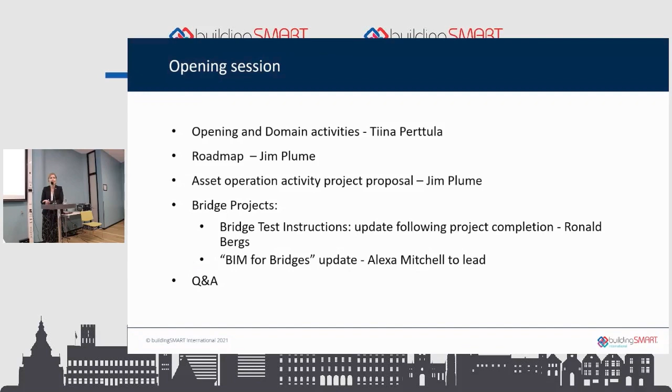Then the opening session presenters, they were shown in John's slides as well, so I won't go into any further details. We have the question and answer session after all presentations, so maybe if you have just one quick comment, we can take those between the presentations, but mainly we are having this conversation part after, so that's why we want to have enough time for all the presenters.

Then about how our infra domain looks like. So we do have the steering committee, and inside the steering committee, we do have different types of roles.

So Jim is here today with me. Jim Plume is our deputy chair in the steering committee. Then we have the technical leader, which is Phil Jackson. Phil is not here in the Lillestrøm summit physically, so he is attending remotely for some of the sessions, unfortunately. And then we have the infra-domain project steering committee.

So that's the steering committee for the project run under the infra domain. The chair of the committee is Marek Suchocki, and Jim Plume is the deputy for the project steering committee. Of course, the stakeholders and project managers are involved to discuss the coming topics and development areas inside those infra-domain projects.

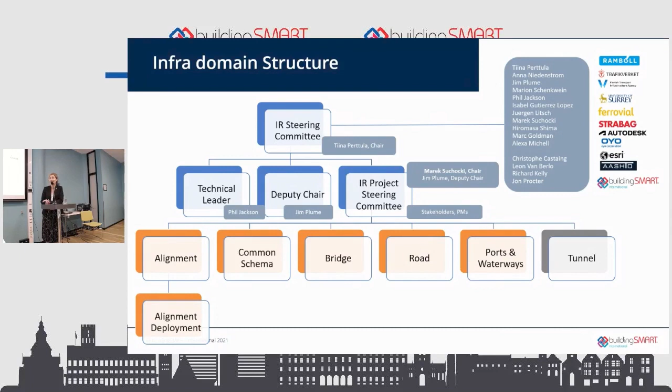Then about our focus areas. The roadmap for 23-27 is of course at the core of everything, and Jim will give the latest updates. The roadmap itself is almost finalized, so it just needs final approval from the SCTE.

Then, of course, there's the question about these technical services like IDS, bSDD, and use case management, and how to work with them. The next session together with the railway domain concentrates on the user experience related to these kinds of tools and services. Then a short update also from the asset operation handover activity proposal.

So what we have been focused on inside the infra domain, and how we think to move forward with the project itself. Then the ISO process I already mentioned. We have been monitoring the ISO process inside the steering committee, and we have been kept updated about the kind of outcomes from the votings and so on.

I'm very pleased to have a good group from buildingSMART International to drive through this ISO process. And of course, there is a lot of liaison with other standardization committees like CEN TC 442, and also now there has been established the BIM GIS group inside buildingSMART International, together with the OGC, and one of our steering committee members,

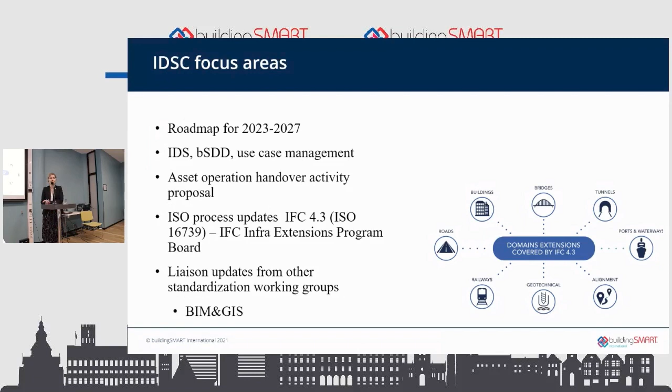But then, how to move forward? I think that one of these topics will be attached to the roadmap work as well, which Jim will present in a short while.

I'm not sure how many of you were here yesterday when they saw the technical roadmap, where for example IFC 5 was mentioned. So it's a question about how to move from IFC 4.3 or 4.4 to IFC 5, and what we as an infra domain should know about the changes, and how can we be part of maybe those groups or technical committees that will work together on the modernization of IFC itself.

But then, when we are coming from the infra domain, it's of course a question about the life cycle itself. How to move from project information to asset information, how to implement ISO 19650. I know it has been at least partly implemented, maybe in some of the organizations already, but there are huge questions related to how to move from the PIM model to the AIM model.

Also the asset register, the databases where all the existing data is located nowadays - how that data fits into IFC, and when can we best utilize the data that has already been collected. Is there a way to harmonize some of the property sets, or maybe the values or other things, because there are a lot of infra owners inside the infra domain.

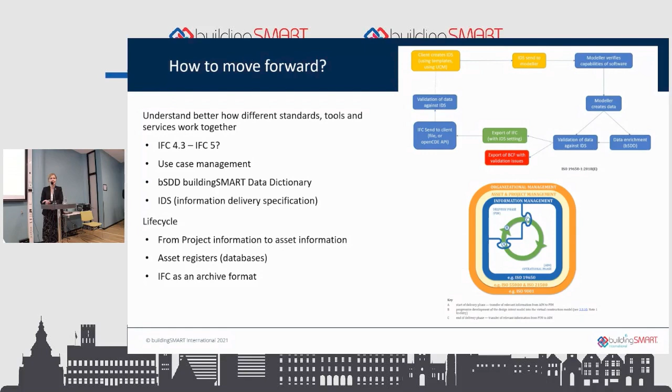And also it's a question about IFC as an archive format, because these legal processes that almost every country's different design phases need to go through are the processes where documentation is created. So what if IFC or some digital format becomes the archiving format in the future? We need further investigation into those topics as well.

But this all links to the roadmap work very well and fits there, and that's why we'd hope to see many of you working with this topic with us in the future in different working groups.

We also need to understand better what needs to be standardized or harmonized. It could be cross-domain, together with the railway, airport, or construction domains, and it could also go to the national level, for how to implement these international standards nationally.

Then there might be requirements coming through owner organizations, like infrastructure owner organizations in different countries. Nowadays maybe some of these requirements are mainly project-based, so we create the BIM execution plan at the project level, but how do we get the circle to be full with the life cycle and ISO 19650? These are really interesting and crucial topics for us to cover.

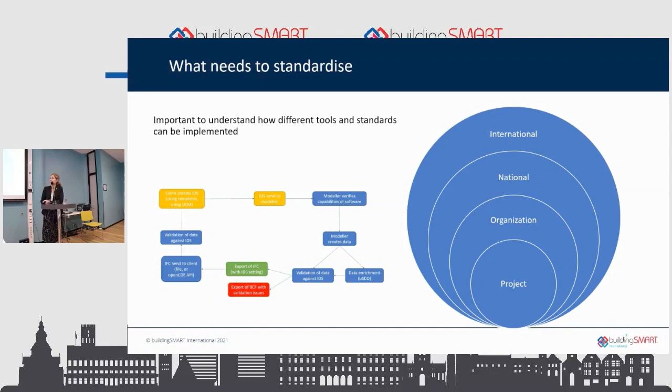A little bit about our sessions during the summit: next we have a joint session with the railway domain about use case management and building smart data dictionaries. It's not a technical session at all—it's about user experience and how to move forward within both domains, how we want to establish collaboration between different domains, because these topics have been recognized across many domains inside buildingSMART, and also how to get our voice heard, especially as infrastructure and railway owners.

Then the last session for today is the Nordic collaboration. We have many interesting presentations during this last session, including one about the Nordic hub collaboration—the Nordic chapters working together.

There's also collaboration through the so-called Nordic BIM client group, where infrastructure organizations in the Nordic countries have put their forces together to try to guide how implementation should happen consistently across different Nordic countries, and to share cross-national topics together.

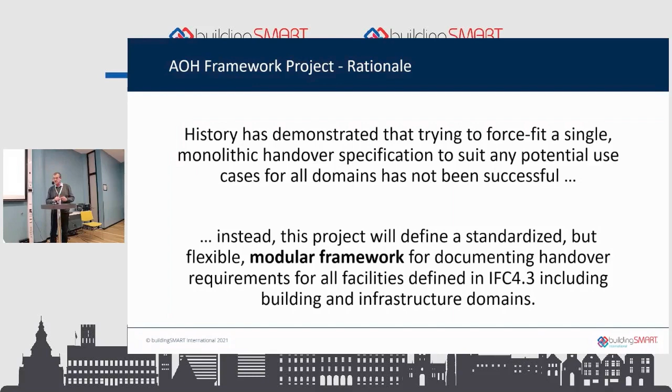You'll see in a minute it's seen as a modular structure that doesn't try to cover every use case. It tries to set up a framework for identifying appropriate use cases, and diagrammatically it looks something like this.

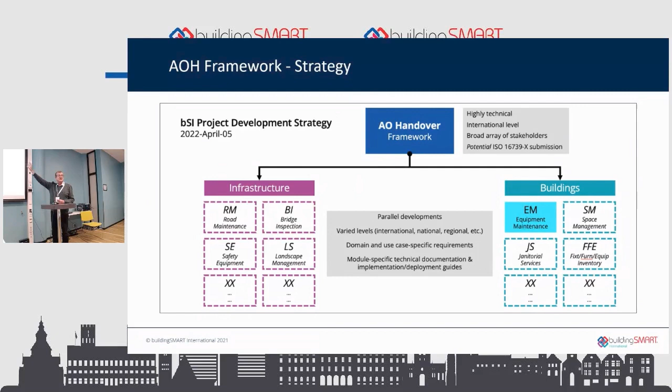So part of our aim as a working group in infrastructure is to think about what are the use cases that are important for infrastructure, in order to contribute to the design of that framework at the top of the diagram.

That's what I expressed in the next figure. What we're focused on at the moment is not this detail, because that's part of stage 2 - that's when the project is running and has already developed the framework. We would then start to look at the detail of both infrastructure and building, but our focus initially is on that framework and what that might look like.

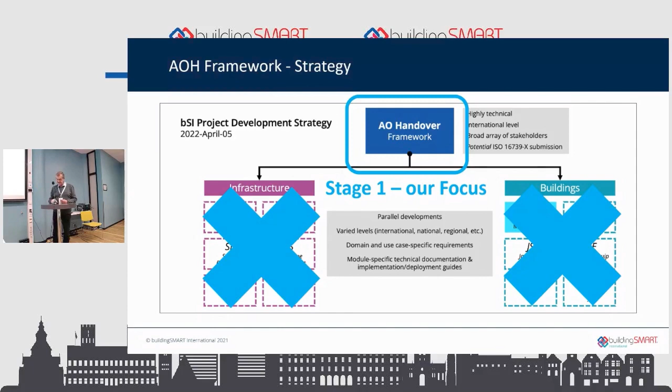So the strategy for us at the moment has two main components. The core specification includes a common set of data exchange requirements needed for all handover exchanges and domains, which may be expressed as a base MVD. That's one activity, which may lead to another base MVD appropriate to this particular broad use case of asset handover at the operations phase.

The second is process and templates to identify and specify the domain-specific entities and the properties required to solve a variety of handover use cases as modules. And so this is where the idea of the modules comes in.

The work that's already been done historically includes things like COBie and FM handover - attempts to tackle this issue in the past. Now we're proposing a framework with a core and a set of generic modules that can then be used to assemble particular use cases across the two domains.

So the blue is building and the green is infrastructure. Again, none of these are locked in - they're simply conceptual placeholders, if you like. Our challenge now is to think about what use cases are going to be needed to help us understand what that core might look like.

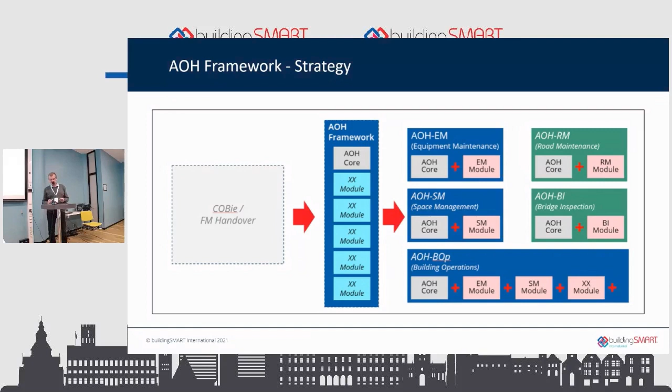So we're trying to develop a framework. We're coming at this with no preconceived ideas. We're coming at it as a search, a process of discovery.

So in our workshop, the framework expressed above is IFC focused, so there's this tendency to think in IFC terms. We've talked about base MVDs, and we've talked about IDS, information delivery specifications, as the tools.

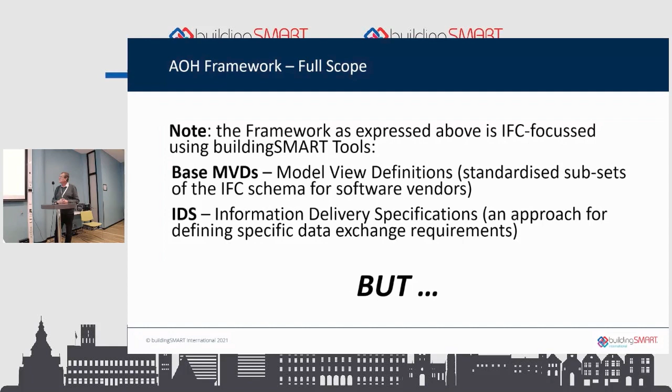But, and there's a big but here, in our domain these IFC-based workflows are seen as only half the story. We need the industry expertise from our domain - in the context of the workshop, that's the participants - to identify corresponding alternative exchange formats and associated workflows. We recognize that in our domain it's not just all about IFC and buildingSMART standards, it's about all the other sources of information and ideas that may be relevant to this issue.

And that is where you, the workshop participants, come into the picture. So we then set this up as our goal for the workshop.

We had two goals. First, we wanted to explore why this is actually needed, because one of our challenges at the moment is that we think this work needs to be done, but we don't have much industry support. We've got a couple of organisations that have put in some base funding, but we need serious funding if we're going to drive this project forward. It'll never happen unless we get that support.

So we needed to think about what the business case is - how can we persuade organisations to participate in this activity? Then we spent the second half of the workshop, which was only two hours, looking at critical use cases that might inform or help us understand what that framework might look like.

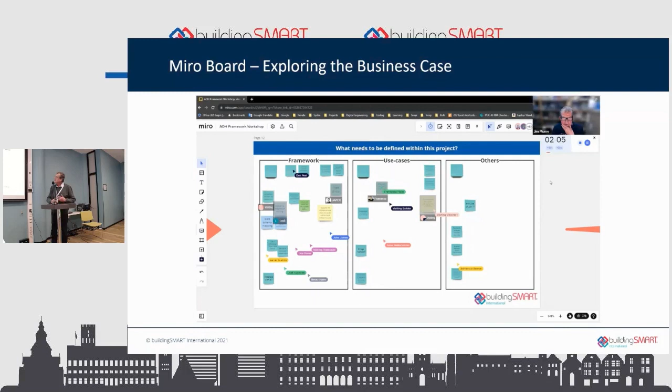So here, for example, when we were looking at the business case, we were asking people to think about what the framework might look like. What are the use cases? What are other things that might inform the way the project is structured? You can see they had notes they could grab, and we encouraged them to grab the notes and put comments on. There was a very lively activity as they populated and answered those questions with their notes.

We then moved on further on the business case - that was the what, this is the why, I think. And so we broke it up into... oh sorry, no, I've got myself confused - this is use cases, thank you. I put a wrong heading up there and confused myself totally. So then we went on to the use cases.

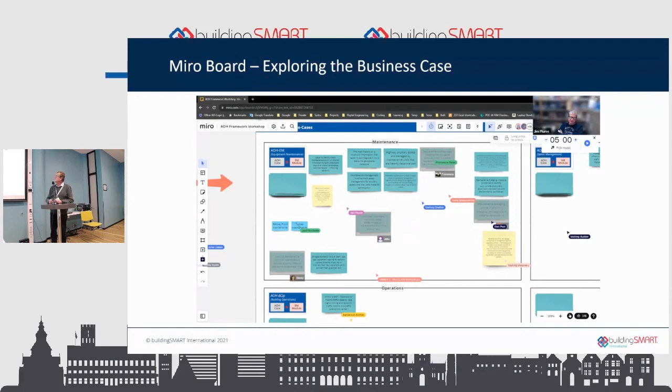So we decided to organise the use cases under three generic topics: use cases related to maintenance, use cases that relate to building operations, and the other one was spatial hierarchy or spaces. We got all these comments put on there, and we then asked them to vote on those - these are the three areas of operations, maintenance, and space management, and people voted.

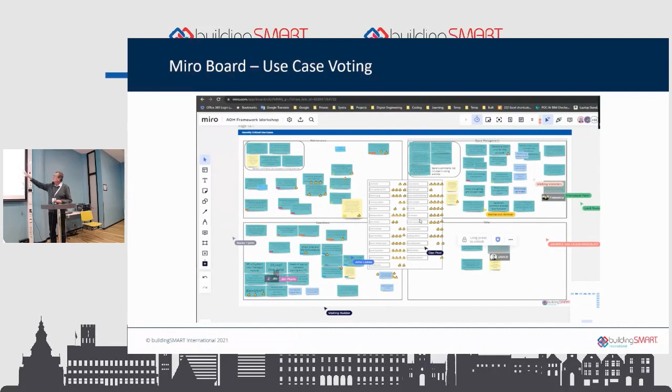This is the voting process, and that finished with these are all the votes. You see that there were people who either didn't vote for whatever reason, or others who weren't able to join the workshop at the last minute. But happily, the Miro board still exists, and people have been able to come in subsequently and add their content to it.

We then, literally in the last few days, pulled out the key outcomes from that, and that's why Anna very kindly stood up - she's going to talk quickly to this, because she worked on this, a first attempt, if you like, at pulling out the outcomes from the business case.

So this is to provide you an overview of the output. We had a lot of people joining the workshop, and they were very eager to contribute, so we got a lot of input. This is just to summarize the Miro board and the notes that we got. This was really to build the business case: what is the value of this project, what can it actually bring to different people? We wanted to have the big picture to be able to promote this project.

When we asked about why this was important, to see the opportunities, people were saying that we need to leverage the value of asset data, to see the value in the data that we create throughout the life cycle.

We need a standardized way of collating all the different information that we create during a project, especially focusing on the information required for the handover. And then optimization - there's a lot of value in optimization. The participants really recognized the ability to automate this process, and again, to increase the quality - not only the value of the data, but the quality of the data.

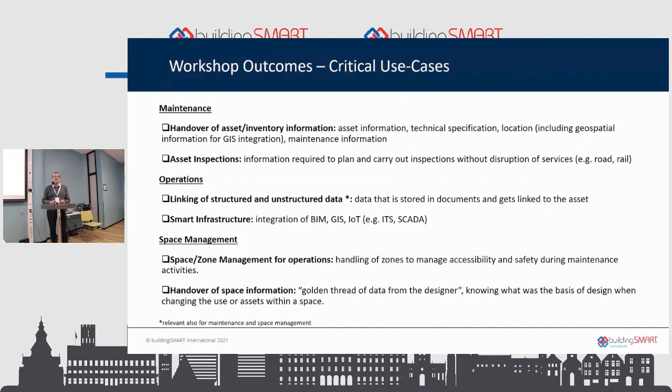The last slide here is the critical use cases, and this is the result of the voting. I'm not going to go through them all because we've run out of time, but you can see that some of the things that came out under maintenance was the handover of asset inventory information.

Operations, the key one was linking structured and unstructured data. How do we do that? And the issue of integration of BIM, GIS and IoT and other things is seen as very important. And under space management, there was the proposal and suggestion of handling zones to manage accessibility and safety during maintenance as a key use case. So these are the use cases that came out.

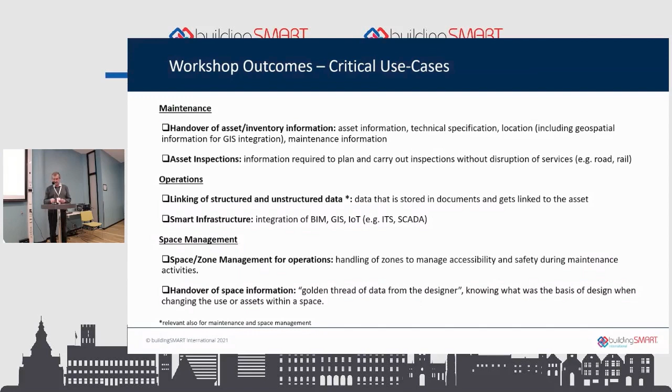We now have the task of pulling all this together and thinking about how we can build on this information as we go forward. And I think that's it. Thank you, that's great, thank you, Jim.

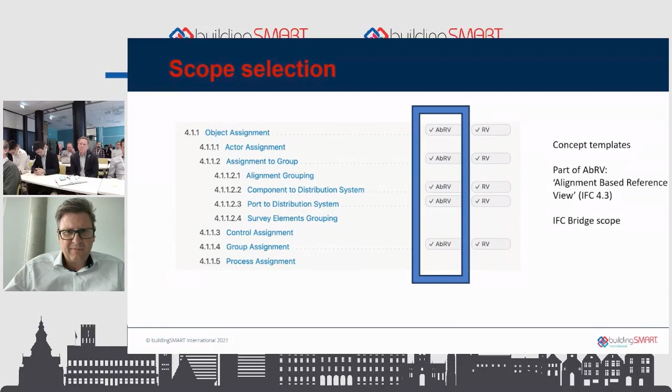Then you have the selection of the whole bridge scope. So for bridge, for instance, if you look at what kind of concept templates we used: you need a concept template to tell something about the project, some project information, because a bridge is part of a project. It's also part of a site, so you need the concept template for the site. Bridge particularly has a superstructure and substructure, so we also need the concept templates for the superstructure and substructure.

But then the question is, there are a lot of concept templates, we could make thousands of test instructions, so what kind of test instructions would we like to make? For that purpose, we asked the stakeholders what should be the focus of these test instructions, and they came with a guideline made by the IFC43 team. The bridge work group had already made some international requirements some years ago, and said it would be logical to look at this guideline and understand what has been required from a user perspective, and try to make test instructions based on these requirements, because then we are focusing on a user demand perspective.

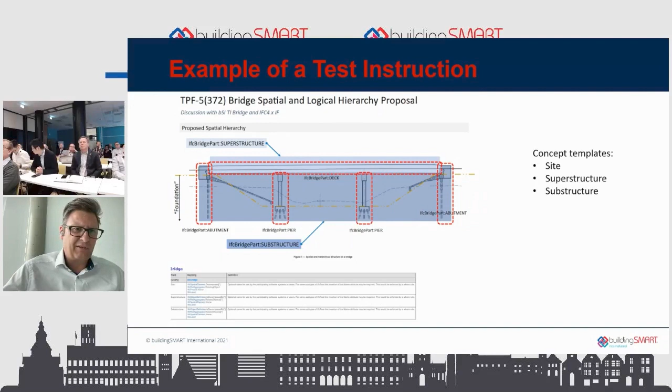So the next slide. If you look one step deeper, so I introduced with the pizza slice that you have a concept template, or even more concept templates, and these concept templates tell us how a specific selection of the IFC schema should be used, what should be entailed. And for the bridge, we have to be specific, go more into detail, otherwise the software vendors can't understand what they should use. Here you see for a site, for instance, you will need the IfcSite, and for superstructure you should choose other entities. Every test instruction is built like this - you choose a concept template, you're looking inside: what do you need from that?

The next example shows how the spatial decomposition has been built up, because you should have a generic way of making a spatial decomposition, a spatial structure of how the bridge is built up. And also here we have defined what concept templates we use, how are the objects related, how can you make sure that you can make this spatial structure in a generic way. And if you have another bridge, it should follow the same rules.

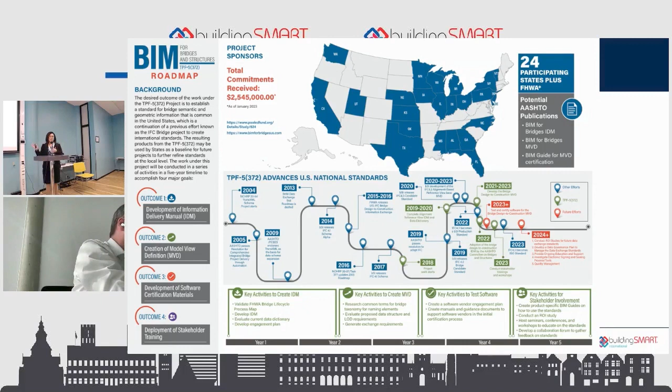We wanted to have an information delivery manual that could be authoritative, so that each owner in the U.S.—in this case, 50 state DOTs—could use the same standards in an authoritative, human-readable manual type base.

When we started, we thought that we were going to be creating a model view definition. That very quickly changed as the standards changed, and so, of course, that is now going to be an IDS to be in compliance with the IDM.

But the last 2 things are probably the ones we're focusing on most in the last couple of years: the development of software certification materials, meaning test instructions that could be passed on to the software and to BSI as a community, so that software vendors could use them—very similar to what Ronald mentioned earlier—as test instructions to help them get prepared for that certification or validation service process.

And then, obviously, how to deploy these newly developed standards at the stakeholder level. So how do they implement the standards? How do they write the requirements for all their projects and the use cases being supported?

So what you see in the roadmap is many activities that have happened over the years. What I love about this project is we're building on the progress that other people have brought to the community. So what you see, everything in blue is done by others, and everything in green are the activities of the project itself.

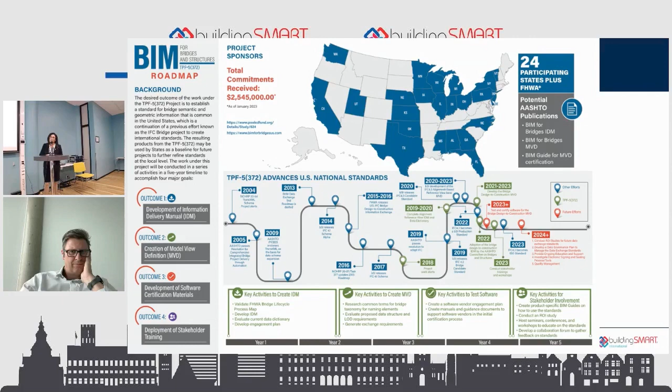These are the sponsors of the project. So 24 state DOTs and the Federal Highway Administration have been provided the funding from the very beginning. And I got ahead of myself, but there you go.

All right, so why are we even doing this, right? In the US, AASHTO is the American Association of State Highway and Transportation Officials, and they are the standard organization for state departments of transportation. So it is the best way to get 50 state DOTs to agree on something through this organization. But the vision was very clear from the very beginning: at the national level, all bridge owners wanted to develop a national standard that could be followed for enabling open data exchange of very specifically bridge structures, using the IFC.

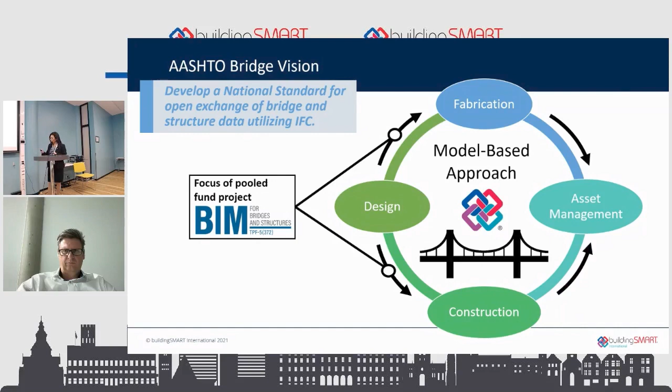And so while the vision is to complete the entire life cycle with open data standards, the focus of phase one of this project was that data exchange that happens between design to construction. So we were not tackling asset management in this use case. It was just really that exchange from design to construction and initiation of fabrication. So I just wanted to make that clear, that is the focus of the project, the scope.

But why a national standard? As you can imagine, 50 state DOTs, many contractors, many consultants - design consultants work for many of the same owners, and you had to reinvent the wheel every time, right?

And so what we're seeing is that this desire to implement digital delivery is what we're calling BIM in the US now, is that we want to really get rid of plan sheets altogether. We want to be able to focus on the model itself and the information itself, so that we spend more time detailing those types of things rather than notes on the sheets.

And so what we're looking at is being able to deliver the model at the time of construction as the legal document, or a legal deliverable if you will - a contractually binding deliverable. Because we want to collect better as-built, and we really want to enhance that collaboration among all stakeholders.

And so to be able to do that, we have to drive standardization. We can't have 50 different recipes for the pizza slice, right? We have to have one. We all have to agree to one. And that's really what is driving standardization.

And honestly, all the things that are needed to do all the other things so that we are collaborating, we are able to verify compliance through that quality check, that we can repeat and reproduce these procedures so that there is better automation, because we don't have enough people to do what we need to do anyway. So we need to leverage technology as much as possible.

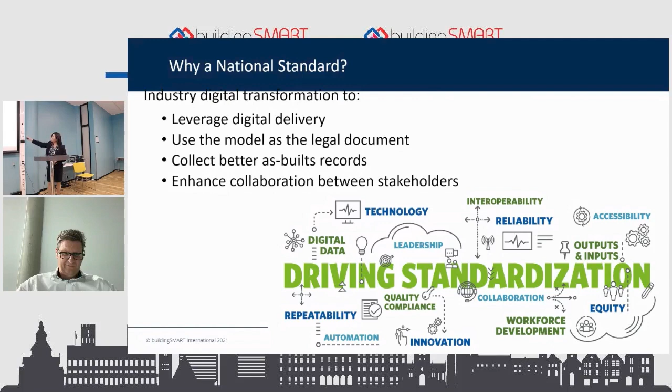But this allows us to innovate. And we wanted to make sure that we were leveraging the best technology, digital information, that we were focusing on interoperability and reliability, but more important, we want to be accessible and equitable to all the parties involved in a project.

So we had to figure out from the very beginning where we were starting and where we were going. And so the first year, it was really about investigating what others had done so that we wouldn't recreate work that had already been done. So we spent a whole year just doing investigations and trying to figure out what was out there.

From the very beginning, we understood that without industry involved, this could never be successful. So day one, even though we didn't have a whole lot to share, we made it very clear that if you wanted to be part of the solution, you needed to be involved from the very beginning. And so we had a software vendor engagement plan.

As we had information, we had workshops every year, and Jeff Ouellette is leading that task. We had work in progress as we went along, being very transparent with the software vendor community. If we didn't have enough information to share, we would say so. But if we did, this is where we are, and you know where we are at every stage of that project.

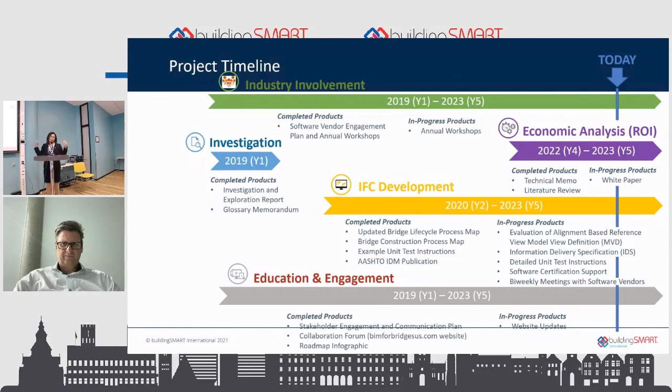You can find the roadmap there, and a lot of the in-progress products are already on the website. You can go in and download all the information, view all the information. It is part of the collaboration process. We have a calendar of events, just for events related to our stakeholders that may be participating. They give us a list and we populate the calendar.

We have resources, and the way we organized it was by audience. So if you come to this website, we wanted to make sure you weren't trying to figure out what was what. So we created sections: if you are a state DOT, an owner, a bridge owner, or a bridge engineer working on a project, these may be the products you may be interested in, versus software developers, totally different audience. We wanted to make finding information easy.

There are so many initiatives happening in the US, but also in the world, and a lot of research happening. So we wanted to connect people with those other resources so it could be a one-stop shop. But we didn't want to duplicate content, so we just directed people to those other locations as much as possible.

But the thing I am most proud and excited about sharing with you, this happened last year: the information delivery manual is available. It is a standard publication by AASHTO. So technically, yes, it's something that needs to be purchased. But what we like about this is that it is authoritative. If it is a standard by AASHTO, that means it's authoritative.

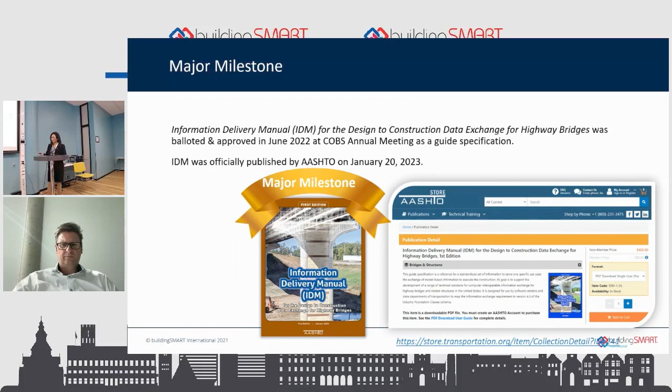As I mentioned, lots of things have happened, but in the past year is where we have made the biggest advancements. We do have an IDS, and AEC3 is the sub-consultant on our team working on it. Thomas Liebich is here, so if you're interested in hearing more, you can talk to him about it.

One of the things we wanted to make sure of before we moved on with the IDS is that the ABRV was going to be sufficient, and that we didn't need to actually create another MVD of any kind. We determined that at this point, it is sufficient.

So we are continuing the development of the unit test suite. If you want to know more about that, you can contact Jeff Ouellette.

I want to mention, because I didn't earlier, that the type of structure we're supporting with this is what we call in the US workhorse bridges, which are the most commonly found bridges in the US. So not your signature bridges - these are your 2-3 span bridges, very simple, that are on every road we cross and go unnoticed. Not the very fancy bridges per se.

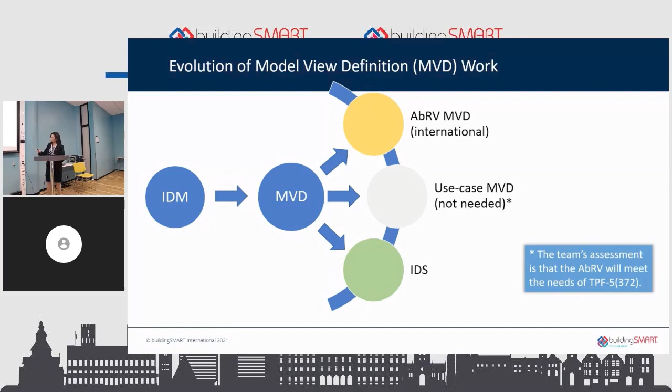As we said earlier, we started with this idea that we were going to create an MVD, but we quickly switched to make sure we were following the framework established by BSI. This is where we start looking at those international, national, organizational, and project-based type standards. We felt that the ABRV at the international level is what we wanted to base this on. We determined that a use case specific MVD was not needed, and we put all our efforts into that IDS development.

I mentioned, and probably not for this audience here so I'll skip, but this is important for the owners or sponsors of this project - that we needed to make the connection between engineering contract requirements and IFC-ish, as we call it, requirements, so we can explain to people very easily what does it mean and why are we doing this project. For those not familiar with open data standards, this was really important for us.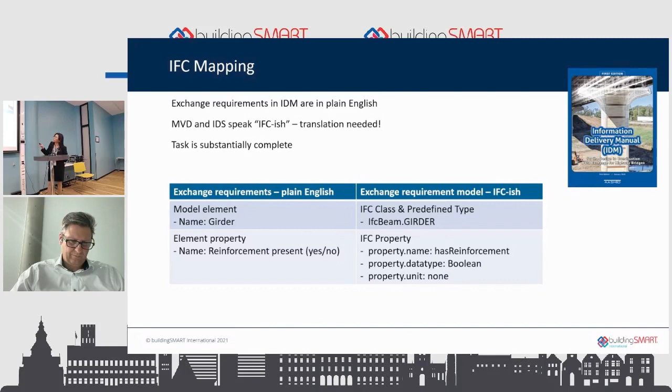The way this will work, we have a very large set of exchange requirements in the IDM. So we are producing one IDS, but if you take a look at it, you could break it up and only use the pieces you want. But the client really wanted one IDS that could suffice this particular use case of exchange of information between design and construction.

This is a very specific use case, which would happen at the very end of the project when the project has been completely designed at 100%. In the US, our advertisement of project is very different - most projects are what we call design bid build. So the contractor doesn't get to see the project files until 100% done, and it is advertised in a sealed bid process. That was very important also, that we would have that IDS to validate that final check at bidding and letting process.

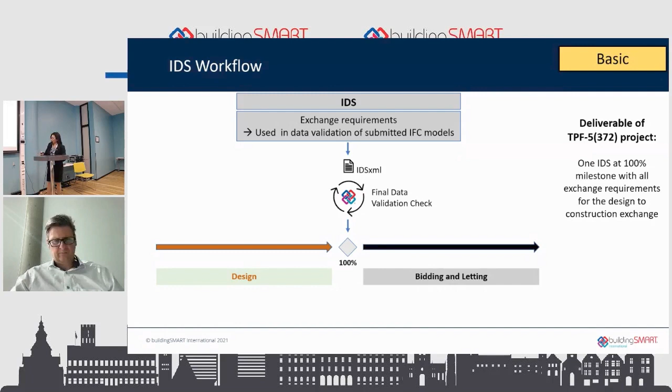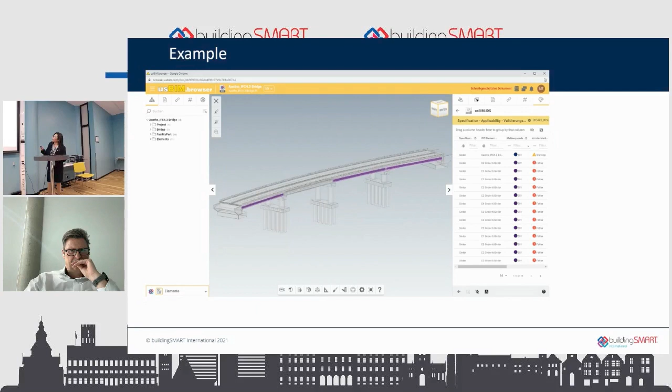We have done some examples of trying to run the current IDS using the ACCA IDS checker. I just wanted to note that - we are testing it with the current tools available in the market. Like I mentioned, you can take that IDS when it's completed and edit it however you need to, take parts of it, or create something for use at the different phases of the life cycle of a project during design and so on.

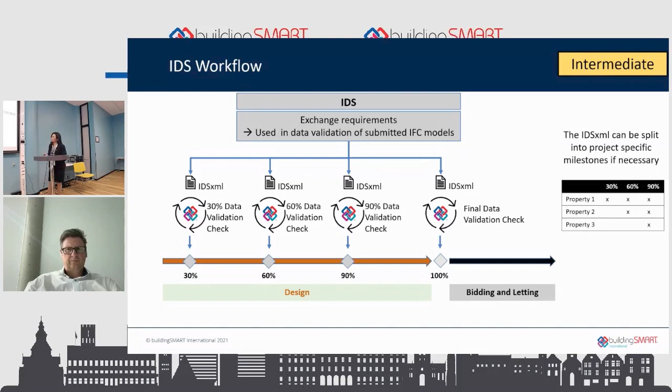We are also working on a data dictionary, and that is another very exciting part and deliverable for this project. The way this is going to work is that we're going to have an AASHTO domain. The name of the data dictionary is not yet determined - we're looking at potentially having something called AASHTO Bridge or just AASHTO, with the idea that other disciplines may contribute to the data dictionary, but at this point it's only going to be bridges that are in the data dictionary.

All of the items going into the data dictionary were reviewed by our bridge engineers to make sure the information was defined correctly based on what a bridge engineer would call things. And it is based on what we call the AASHTO LRFD bridge design specification.

And that is basically the primary design specification for the US that all bridge engineers use. We also took a look at the Bridge Inspector's Reference Manual, which is a federal highway publication, and the AASHTO Transportation Glossary. We wanted to make sure that whatever we were defining in the data dictionary had an authoritative source.

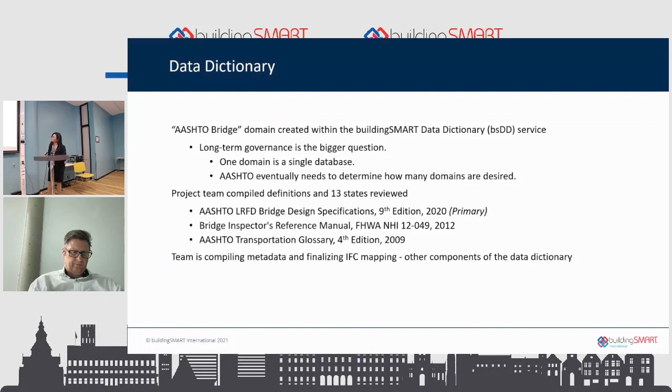And so we are in the process of finalizing that. Like I said, if you were to do a search right now in the BSDD, what you will find is a very light example of what we are proposing. But we are looking at being completed by the end of January of 24, so that it will be available in the BSDD for anybody to search.

These are some of the examples. Most of the information obviously is being created by the IFC experts, but we wanted to make sure we were working with the bridge engineers to say, does the definition really make sense from a bridge engineering perspective, so that we all are in agreement. So that's one of the things that we did.

So far, like I mentioned in previous years, software vendor engagement was very quiet because we didn't have anything to show. We were just having those conversations. However, this year in 2023, that effort has been ramping up, and Jeff Ouellette holds bi-weekly meetings with the software vendors. What happens during those meetings is they give us a preview of their progress on how they're implementing the very preliminary information that we're providing.

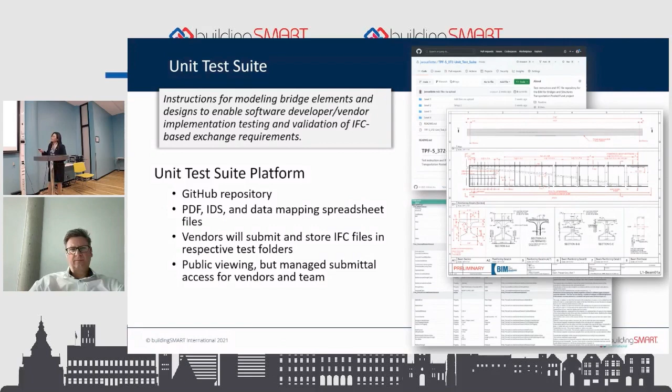We're getting close to time, Alexa. So yes, I don't know whether you want to just sum up and we'll see if there's any questions we can take before we finish.

Yeah, so I think what I want to leave with is phase 2. What happens after January 31st, 2024? There is a phase 2. The owners were so satisfied with the progress of this project that they decided to fund a second phase to look at potentially more development of IDSs, different use cases. What those use cases are, we haven't determined, but we're looking at at least 3 more use cases in terms of the standards, depending on the level of effort. We believe that we can move a lot quicker now that we have established a framework, and it's not going to be as hard as it was.

So far, we have 15 states that have committed funds to the second phase. So with that, I'm just going to give it back to you. Thank you. Great. Thanks, Alexa.